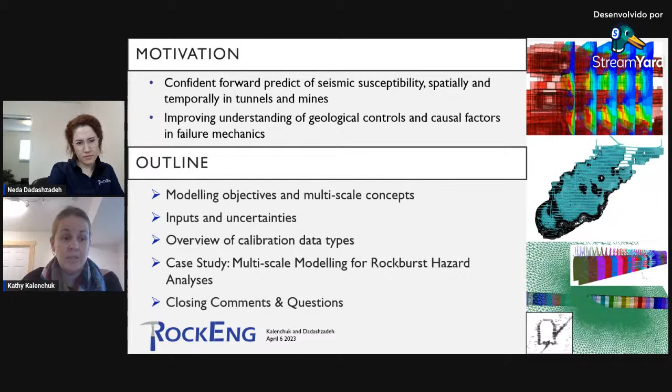The application of numerical models in geotechnical hazard management can be broadly classified into two groups: susceptibility modeling and mechanistic modeling. Susceptibility modeling investigates the likelihood that a geomechanical system will be exposed to a particular ground reaction. And this requires global project scale stress models, where our scale of interest is in the order of hundreds to thousands of meters. Often, global susceptibility modeling relies on either mechanistic analyses or empirical correlations to predict failure mechanics.

Mechanistic modeling aims to improve our understanding of fundamental mechanics, and this becomes critical for tunnel scale analyses. Our scale of interest for mechanistic analyses is in the order of tens to hundreds of meters, and the enhanced model resolution that is achieved improves our representation of constitutive models, and it also improves our ability to simulate the interaction of ground support systems with the surrounding rock mass.

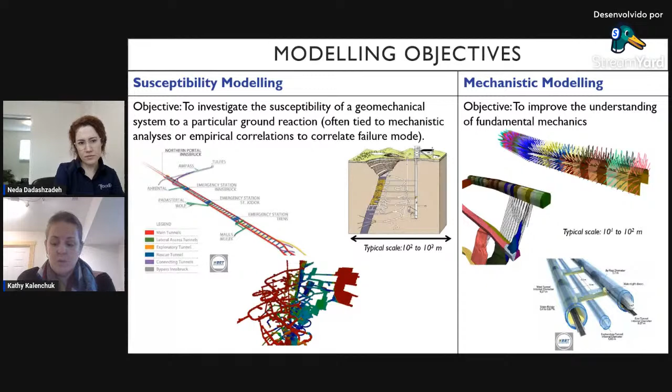When we develop strategic and tactical strategies to manage geotechnical hazards in mines and tunnels, we often rely on multiscale modeling. Multiscale modeling is a process where we make use of both global susceptibility models as well as local mechanistic analyses. The first step is often to do project scale modeling to provide a susceptibility forecast for global and local scale hazards. The second step is often local scale mechanistic analyses, and these must be coupled with our project scale understanding so that the local scale mechanics can be evaluated with an understanding of broader geological controls on boundary conditions and material competencies.

Once we have a holistic understanding of global geological controls on stress and material domains, a picture of project scale stress, strain, and state evolution, and a local understanding of hazard mechanics, interpretation of the spatial and temporal distribution of hazard intensity can be achieved. So these combined global and local efforts facilitate informed decision making when we want to develop and implement risk mitigation strategies.

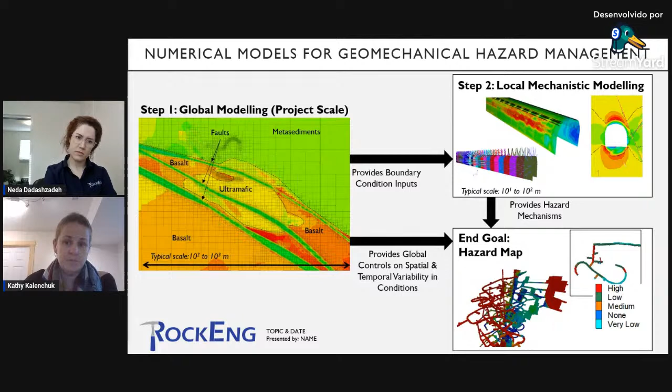When developing numerical models, we need to consider various inputs, and these include excavation shapes, geological domains, geotechnical domains, and our boundary conditions. These model inputs are achieved from a variety of data sources, and our level of confidence in each of these inputs is variable. The excavation shapes are often based on design solids or surveyed as-builts, and we generally have fairly good confidence in model geometries for most modern applications. Geological modeling and geotechnical modeling rely on similar data types. We often look to mapping data or drill core logging, and possibly the use of geophysics or other instrumentation.

Loading conditions or boundary conditions tend to have the most unknowns, particularly in situ stress state, which is often a very data limited component of our site characterization. Over the scale of an entire project, we tend to have very few measurements of stress state, and this is due to the inherent costs and difficulties in achieving reliable measurements of a global stress tensor while also capturing local variability.

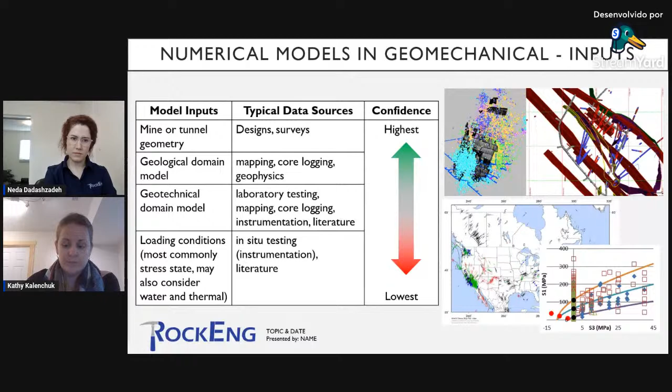Model calibration is the process of correlating observations of actual ground behavior with numerical output, and this helps us to refine numerical inputs. The back analysis of observational data is fundamental to achieving confidence in the inputs that we apply to a numerical system. So what's important here?

First of all, we need to have an understanding of our geological domains, geotechnical domains, and our global stress state. And where observational data is available, model calibration is critical for all components of our inputs. We have to calibrate not only material properties, but also our boundary conditions, also our constitutive models, and in some cases, we actually have to calibrate our input geometries.

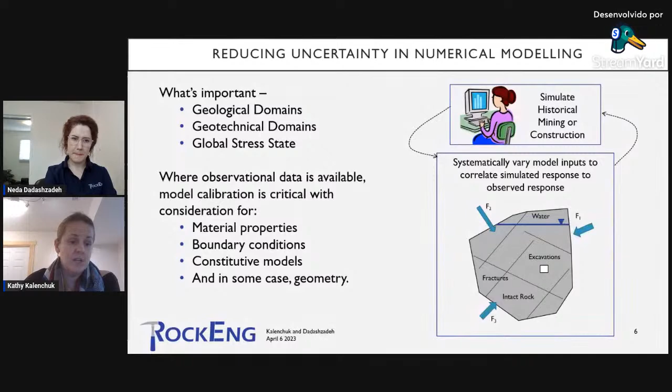There is a broad spectrum in the level of calibration detail that can be achieved, from qualitative ground response to sophisticated quantitative calibration. The level of rigor and detail of calibration is dictated by our data that is available. Qualitatively calibrated models provide us an indication of different classes of behavior under varying loading conditions, while quantitatively calibrated models provide direct indications of likely rock mass stress and strain behavior. Both of these approaches facilitate risk management.

However, quantitatively calibrated models typically have reduced uncertainty, which means that we can optimize our design and often work with lower factors of safety. Quantitatively calibrated modeling is exceptionally difficult to achieve because it requires very high quality instrumentation data. Now let's look at a few different types of calibration data.

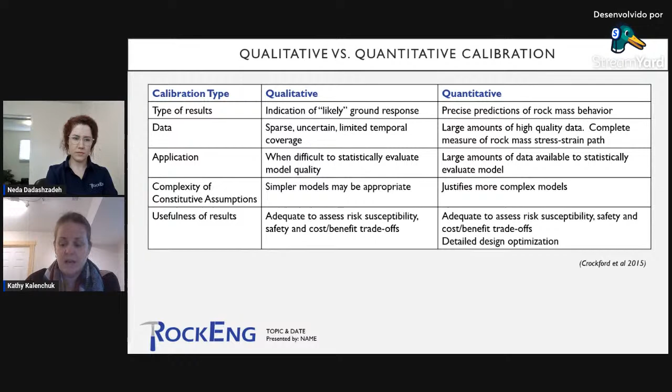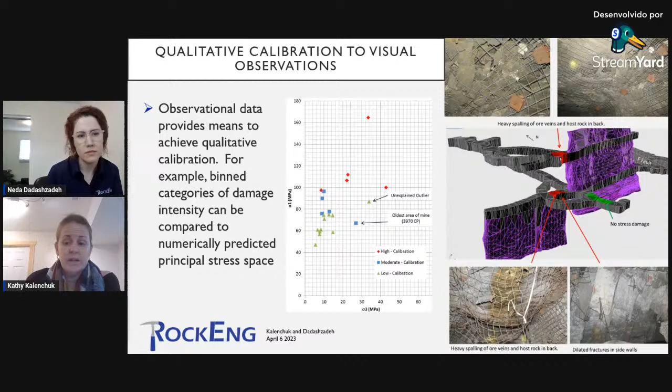The most rudimentary form of calibration data is visual observations of ground reaction. In this case, we have no real measurements of deformation or state, and so our calibration is limited to very qualitative means. I have a simplistic example shown here on the screen whereby damage mapping observations allow us to make a comparison of damage intensity to numerically predicted stress or strain states. A well-calibrated model would conclude that similar loading conditions for similar damage observations can be correlated for any particular geotechnical domain.

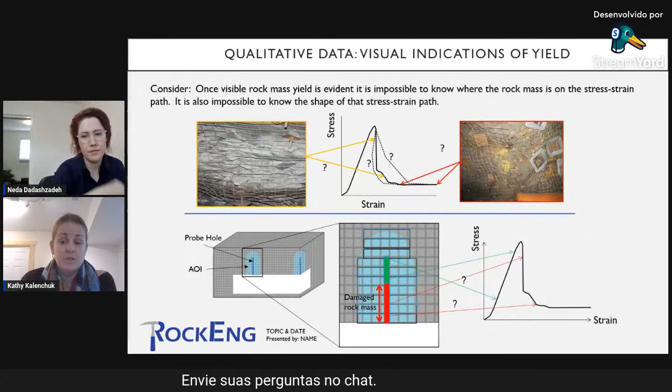It is important to recognize that if we have to rely on visual observations, they are not providing direct measurements of constitutive behavior. Once a rock mass has any visible evidence of yield, it's impossible to know where that rock mass is on the stress strain path. And this is a very significant limitation to model calibration. It is very difficult to define the shape of our stress strain path and almost impossible to accurately do post-peak parameterization. A few examples are shown here on the slide.

The top image is conceptually illustrating that damage observations, in this case in the tunnel walls and in the back of a tunnel, conclude that a rock mass is post-peak. But it provides no further information. This is a very black and white situation. The rock mass can only be classified as failed or not.

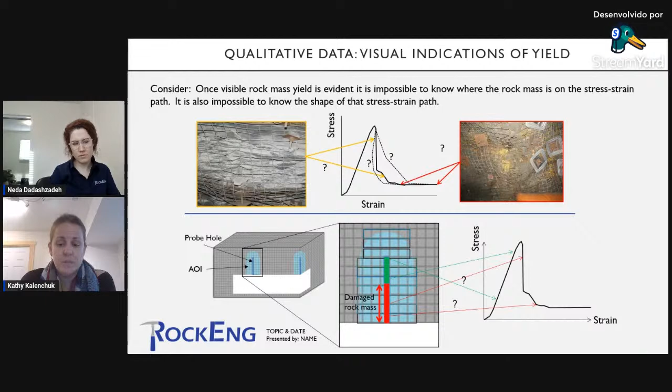The schematic on the bottom demonstrates conceptual probe holes. Geotechnical practitioners often rely on probe holes to observe damage depth around the periphery of an excavation. This provides a bit more information than visual observations of superficial conditions alone. However, we still do not have any direct measurements of loading conditions or strain accumulation.

Model calibration is improved when we have access to data from conventional instrumentation. Instrumentation provides physical measurements of rock mass stress state and strain accumulations. Stress and stress changes can be sampled by various types of stress cells or geophysical methods, and strain is measured by either superficial or borehole deformation monitoring. And there's a number of examples shown on the screen here of different types of monitoring systems, ranging from radar or laser scanning systems through to borehole instrumentation.

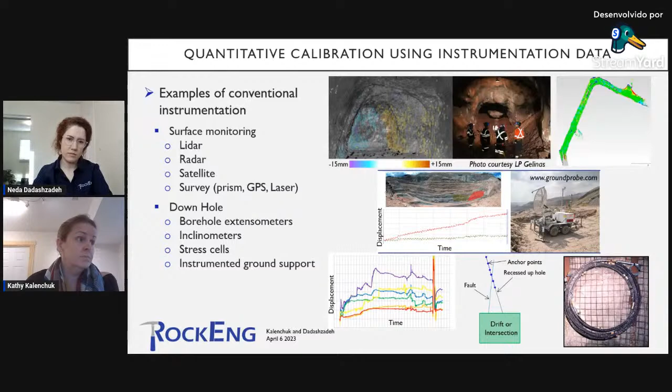When we work with conventional instrumentation to calibrate numerical models, the process is actually very straightforward, because we have physical measurements that can be directly compared to numerical output. What I have shown on the screen here is an example of an underground pumping station. Unfortunately, this particular pumping station has accumulated some damage due to squeezing of the walls. We can see in the photographs there's some cracking in the concrete liner and some floor heave in the excavation.

So in this case, the pumping station has several monitoring points along the main chamber, and those monitoring points could be used to measure closure and correlate it to numerical models. So the main chamber is illustrated here in the numerical model geometry by the red and green excavation. And along the axis of that excavation, we're monitoring closure. So some data can be directly compared from real life to the numerical model.

And what we have shown here in the bottom right-hand side of the screen is monitored closure, so physical measurements, compared to modeled closure, which comes from the numerical model. And we can make direct correlations on goodness of fit.

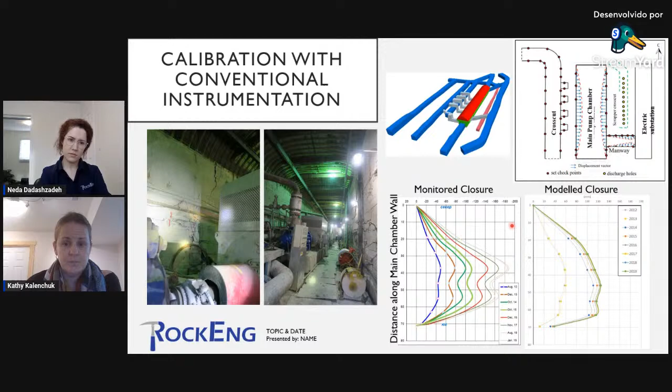There are a few challenges that we must acknowledge when we're working with conventional instrumentation data. First of all, spatial resolution. It is nearly impossible to get a fully three-dimensional picture of stress and strain unless we have really big monitoring budgets. Individual measurements provide information at specific points in space, and practitioners have to be careful to ensure that they are understanding whether particular observations represent a global ground response or a localized mechanism.

A second challenge in conventional instrumentation is that our goal is to capture measurements of the complete stress strain path of a rock mass. And we very often do deformation monitoring, but less often we do stress monitoring. And so we don't get the stress component of the ground reaction, typically. The third challenge is temporal coverage. Instrumentation is commonly installed after some amount of rock mass damage has accumulated. This is particularly true in mining, where instrumentation is often used reactively rather than proactively.

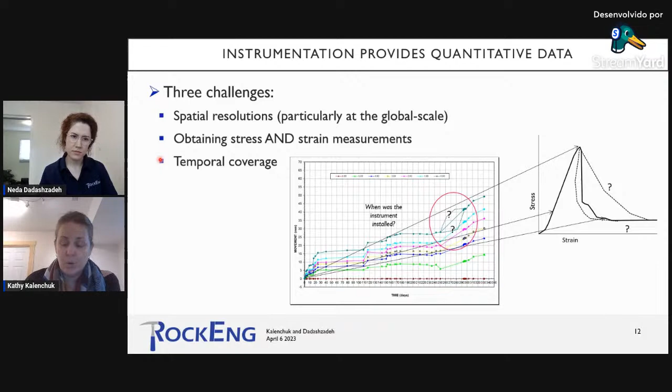The third type of calibration data that I would like to mention is microseismic data. Microseismic monitoring is much more common in the mining industry than in civil projects. Seismic data provides us a fully three-dimensional volumetric representation of where the rock mass is transitioning through the failure process. And it also characterizes the energy that is released during fracturing and deformation.

What I have shown here in this slide is a long section view of a mine. All of these red lines are different tunnels in the mine. And all of the colored dots or circles that we see are seismic events that have been measured by the monitoring system. And so you can see some areas have no seismic events occurring. This would be areas of the rock mass that are not actively failing. And where we see lots of clusters of seismic data, it is indicating to us that our rock mass is going through the failure process.

And so we know that the onset of seismicity occurs well before peak strength. This is generally correlated with crack initiation at the laboratory scale. Seismicity will generally ramp up in intensity as we approach the peak strength of a rock mass. And then post-peak, we will continue to see some seismicity until a rock mass becomes aseismic, at which point we know that we're in a residual state. So with this knowledge, we can effectively map spatially where the rock mass is transitioning through a failure process.

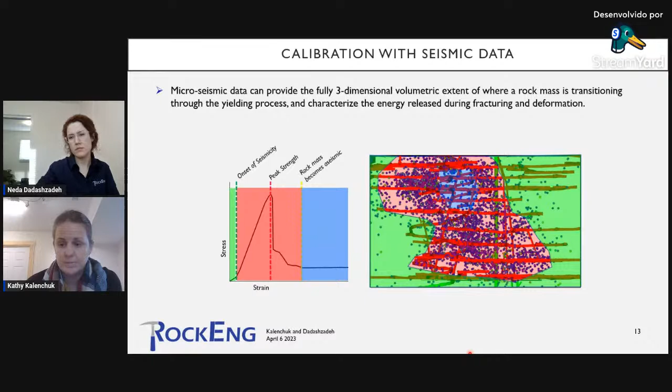When you have good quality seismic data, there is excellent opportunity to achieve quantitative model calibration. And this is done by using our seismic data to sample the stress, strain, and yield states within a numerical model. And for any particular geotechnical domain, the model state should be statistically repeatable where seismicity is happening, because the material properties are constant within an individual domain. We expect rock mass failure to occur under reasonably consistent loading conditions.

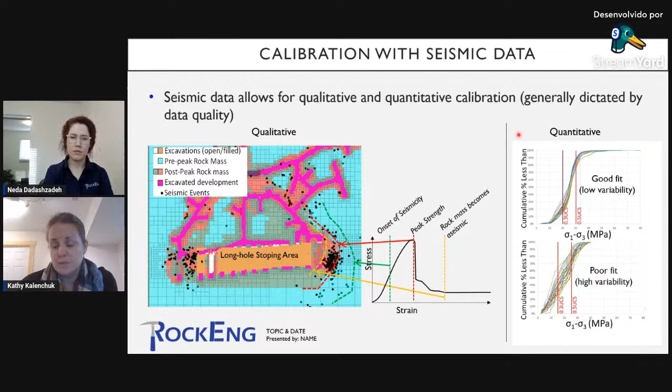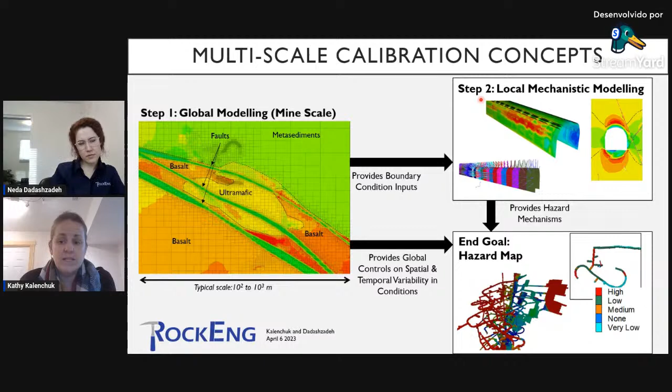Now, going back, let's recall that geomechanical hazard analysis relies on both global susceptibility modeling and local mechanistic modeling. And it's important to recognize that the calibration process, the inputs and the outputs will vary quite significantly depending on the scale of your simulation.

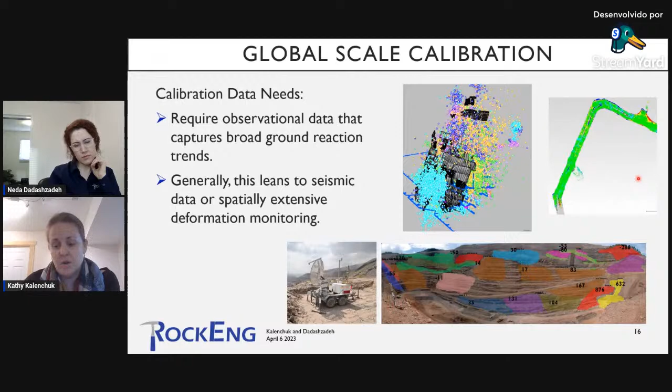If we look first at global model calibration, we generally require ground reaction data that's available for a large portion of the project volume. Therefore, we generally require seismic data or deformation data with broad spatial coverage in order to achieve calibration. So here's an image showing seismic data around an underground mine. Large slopes we monitor with radar systems, so that gives us deformation monitoring over a large area of our interests. And evolving technology using LiDAR and scanning tools in underground excavations allows us to achieve broad spatial coverage of deformation monitoring in underground excavations.

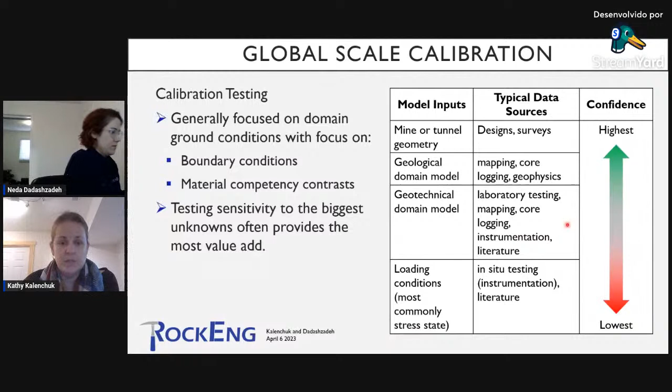At the global scale, calibration testing commonly focuses on domain conditions and the influence of both boundary conditions and material competencies. So in my experience, testing should prioritize a focus on numerical model inputs where we have the greatest uncertainty, and that provides the most significant added value to our modeling project. And of course, our greatest uncertainties are often situated around loading conditions, boundary conditions, and in some cases, geotechnical parameterization. So in most cases, as I said, the largest unknown is in situ stress state, and methods for how we initialize boundary conditions in a numerical model can have a substantial impact on the quality of our calibration.

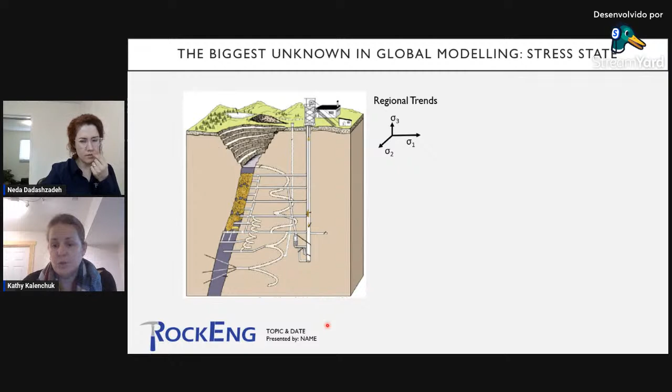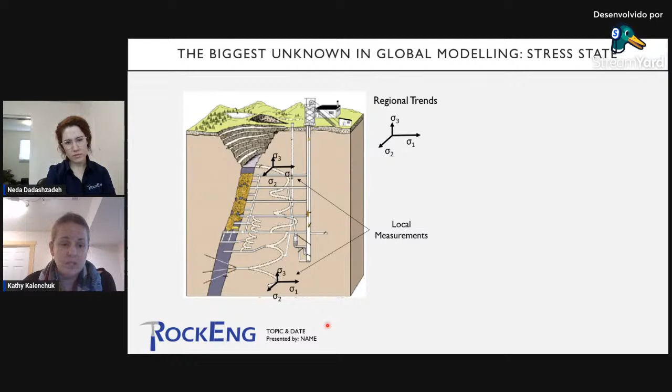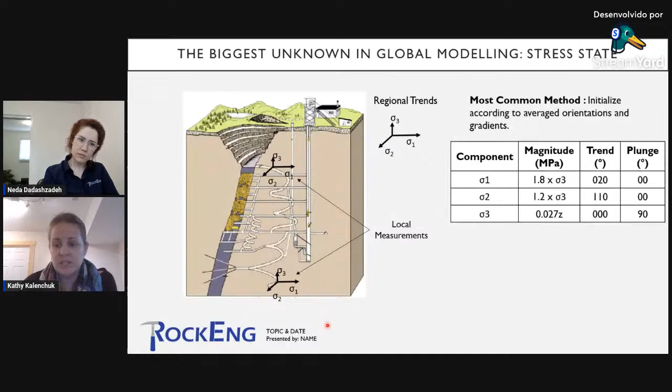So let's look briefly at a few different methods for applying in situ stress to a numerical model. Consider here that you have an underground mine, and we have to think about what types of data might be available. There may be a conceptual understanding of regional in situ stress trends, maybe based on tectonic history. And if we're lucky, we may have a few local measurements of in situ stress from our project area. The most common method for initializing in situ stress in a global project scale model is to simply initialize our average boundary conditions, sometimes with gradients associated with depth.

An alternative method for initializing stress is to use strain-based stress initialization, and this allows us to capture stress state gradients that are associated with stiffness contrast between geotechnical domains. With this method, strain is induced within the numerical model, which is reasonably consistent with the site geological history. And it allows stress within individual geotechnical domains to come to a more natural, non-uniform state. So to simplify this, you can consider a system of springs. If you apply a constant deformation to two springs with varying stiffness, the required force to achieve that deformation varies. So hence we are effectively squishing and squeezing our numerical model until we have a representative stress state.

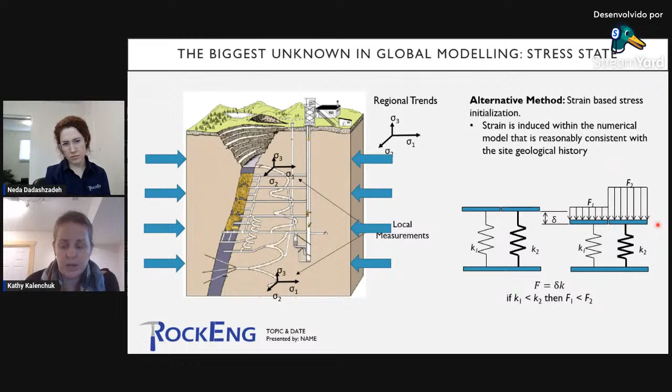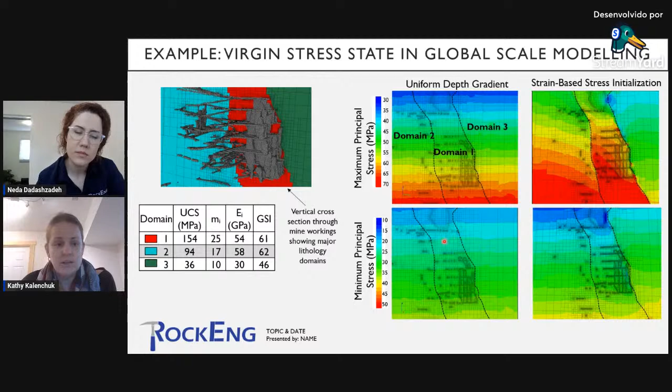Now, when you initialize numerical stress, there's 2 methods: a uniform depth gradient, which is shown by these cross sections on the center portion of the screen. We can see stress magnitudes increasing with depth. And the alternate case would be strain-based stress initialization. So here we can see there are 2 wildly different results for the stress initialization. And Dr. Dadashzadeh will demonstrate later the importance of this in our mechanistic analyses.

Now, jumping back to local model calibration rather than the global calibration, we know that the ground reaction observations have to be much more detailed. And so we generally lean on using conventional instrumentation to calibrate our local mechanistic analyses.

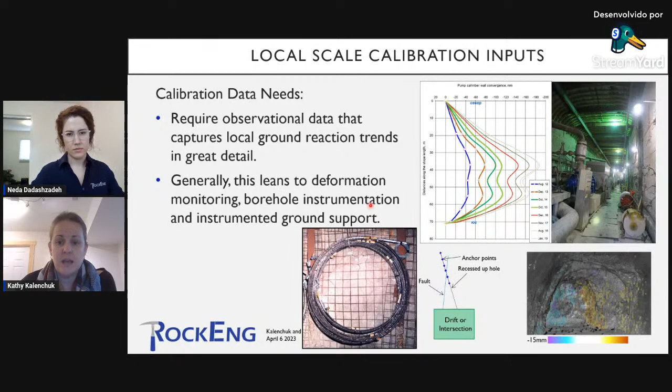So last statements here before I hand the floor over to Neda. I just like to point out that in summary of model calibration, it is critical to calibrate our models in order to have confidence in making forward predictions. But the value in model calibration goes well beyond predicting the future. At the global scale, we strengthen our understanding of broad geological. We improve geotechnical domain, and we improve confidence in our boundary conditions, as well as allowing for mechanistic domaining.

At the local model scale, calibration allows us to improve confidence in our constitutive behavior. It provides explicit evaluation of failure mechanisms, and it reinforces our understanding of geological controls on ground reaction. And now we're going to switch over, and Neda will demonstrate multi-scale modeling through a case study.

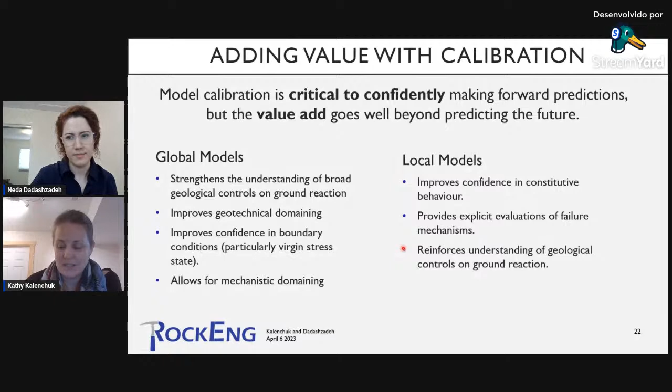Thank you, Dr. Kalenchuk.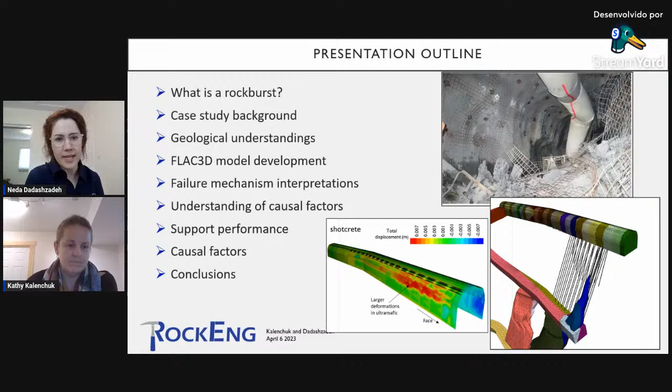Okay, so for the rest of this lecture, I'm going to present a case study where a large magnitude rock burst in a deep mine tunnel was back analyzed with numerical modeling using FLAC3D. So during the presentation, I will first briefly touch on some background of rock burst failure mechanisms, so if there are people from different backgrounds, hopefully they will follow the talk easier.

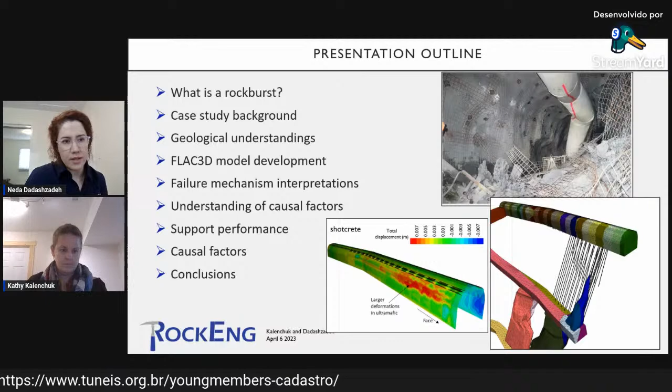And then I will go over some background of the case study itself, and then we will look into details of the numerical model, how the ground reaction was interpreted, and different ground reaction indicators, including support performance, will be analyzed. And finally, we will summarize the causal factors and conclusions.

So sudden deformations occur in hard rocks under high stress conditions, and this ground response induces seismic events that result in energy release in the form of seismic stress waves and seismicity. So as a reference to get a feeling, the excavation-induced seismicity is somewhere between the large magnitude events that are induced by earthquake activities and the microseismicity that is typically measured by acoustic emission tools. So excavation-induced seismicity in deep excavations is somewhere between these ranges.

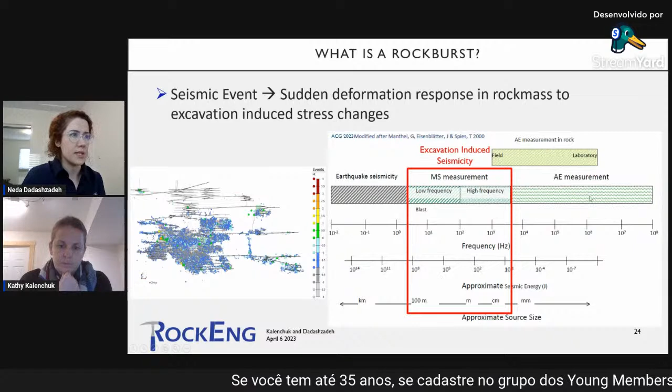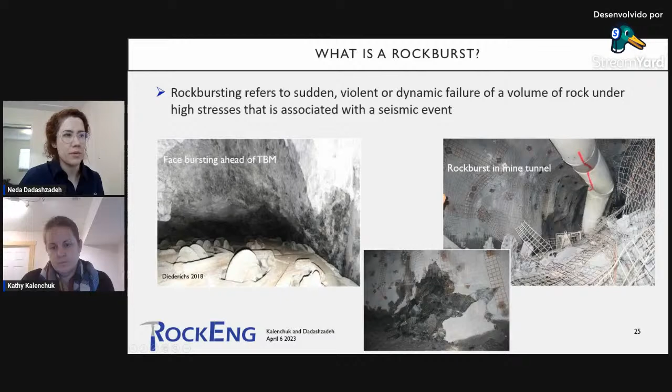So rock bursting is a widely recognized hazard in high-stress excavations, which specifically refers to sudden and violent failure of a volume of rock that is associated with a seismic event. So on the left figure, you see an example of a rock burst ahead of a TBM machine. And on the right, you see a major failure of a mine tunnel, which we will focus on shortly in this case study.

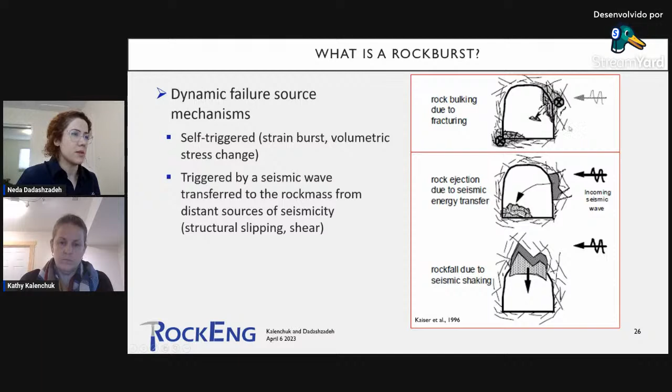So in general, rock bursts are categorized in two classes of source mechanisms. It can either be self-triggered, which is also known as strain bursts, and are commonly associated with stress-induced spalling or slabbing at the periphery of the excavations, which is schematically shown here, or it can be triggered by a distant seismic source. This can be slipping of geological features like faults or other joints, which can transfer seismic energy to the rock mass at the excavation boundary. So the focus of this talk will mainly be on strain bursts, but we will briefly touch on this mechanism as well.

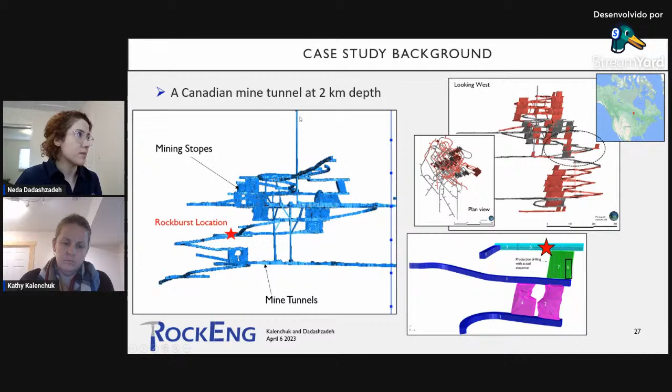The case study investigated here occurred at a Canadian mine. The actual mine layout is very complex, but here we have an example of the area of interest. You see some networks of the mine tunnels, which are access to the ore body, and you also see the stopes, which are actually the ore body that needs to be excavated. So the rock burst occurred in this tunnel, which is approximately 2 kilometers below the surface.

So in terms of local geology, the top figure shows a cross-section through the tunnel where the event occurred. The location where the rock burst happened is indicated by this star. So the major section of the tunnel is in basalt, which is a fairly stiff and strong unit, and the far end of the tunnel is in ultramafics, which is relatively softer compared to basalt. You see the contact shape between the basalt unit and ultramafic unit shown by this red shape. There is a local fault that is subparallel to the tunnel as well. And looking from the front view, looking north-south here, there are also two regional faults that are also subparallel to this tunnel.

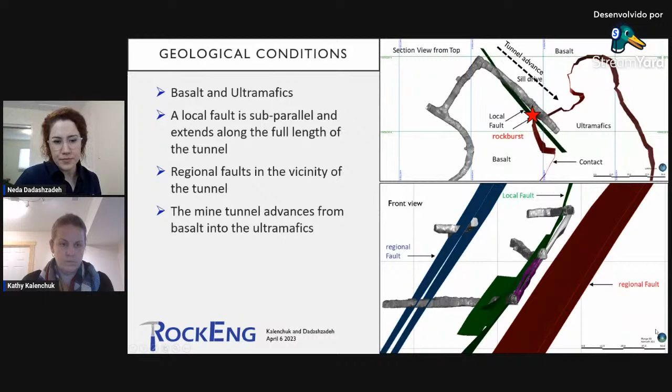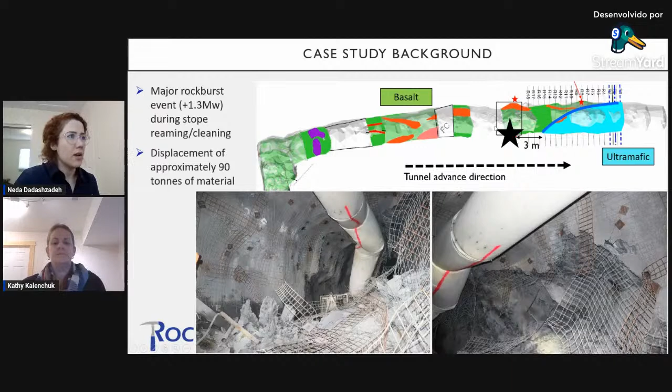So the tunnel advances from basalt into the ultramafic unit. The major rock burst that is the focus of this talk occurred within the basalt unit on the south wall, roughly 3 meters behind the ultramafic contact, which is shown by this blue between the ultramafic and basalt. The event occurred 2 months after the tunnel excavation was completed, but during the advancement of the tunnel itself, the drift had been seismically active with some less severe damaging events on the north wall. But the major event occurred when some drilling was happening on the lower level, and during the cleaning of these blast holes, it occurred, as I said, about 3 meters behind the contact.

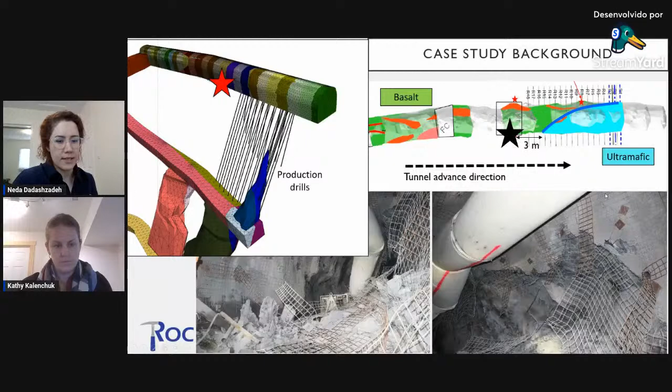And the seismic SMTI analysis from the seismic event also identified 2 potential failure planes, which are coincident with the east dipping and the southwest dipping planes. So putting all this information together, the damage incurred by the rockburst event in the south wall was associated with 2 local structures and this local fault that the geometry is representing.

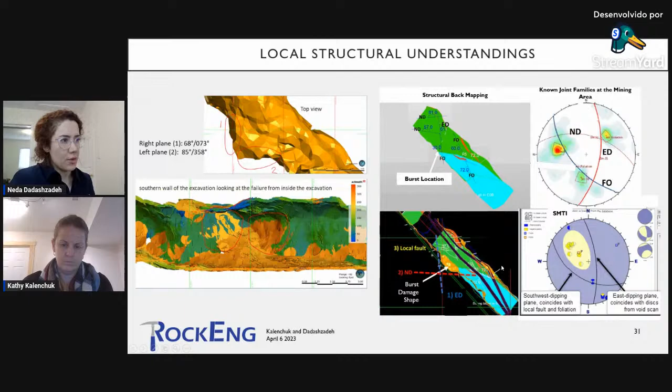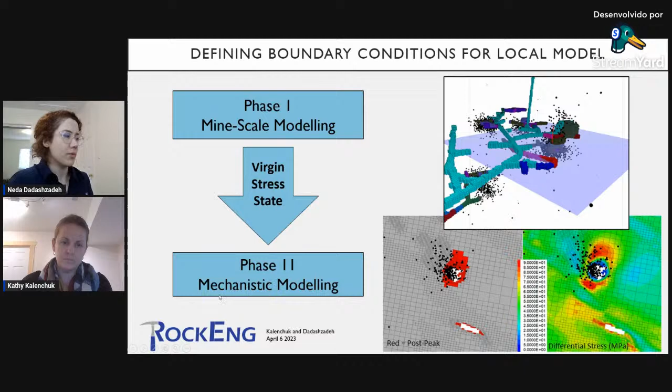So for back analysis of the failure, extensive numerical modeling work was done for this mine site. The first phase of the analysis included a large mine-scale numerical model, which was calibrated using mine-wide seismic data and ground reaction observations. And the model results from that global modeling work were used to define the boundary conditions locally where exactly the rock burst happened. And then those were fed into the mechanistic modeling that I'm going to show.

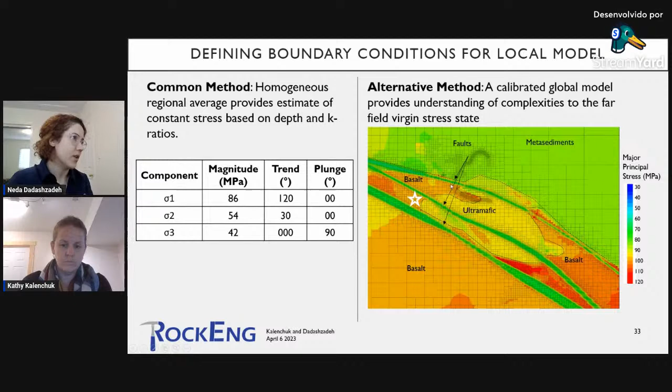So this slide also shows the significance of the global modeling using the strain-based loading, actually. So we have a plan view section through the burst location, and this is indicated here for your reference, and this is the mine tunnel. And the contact, just for your reference, this is the contact between the basalt and ultramafic. So in the left, you see a constant stress tensor based on depth, and the right is actually the stresses that are sampled from the global model, which clearly shows the stress heterogeneity between two lithology domains.

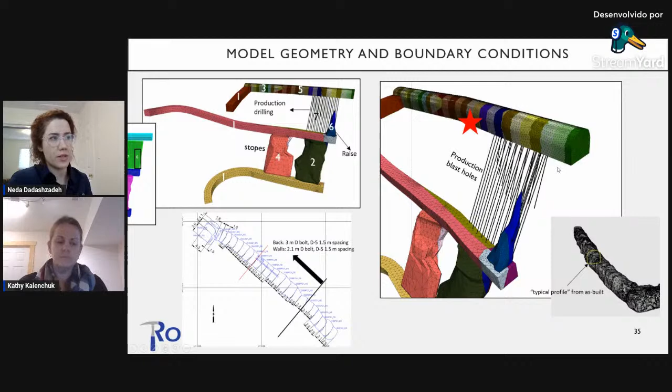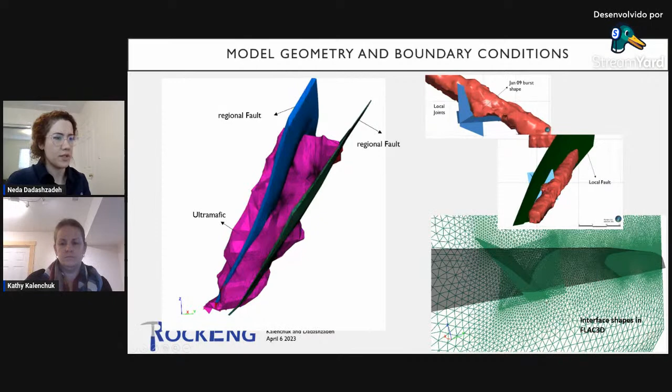So this slide shows the ultramafic contact and two regional faults, which were modeled as continuum domains, but the local structures and the local fault were modeled as discontinuum interfaces. We use generalized Hoek-Brown for the regional faults, whereas for the structures, we use the bilinear Mohr-Coulomb criterion.

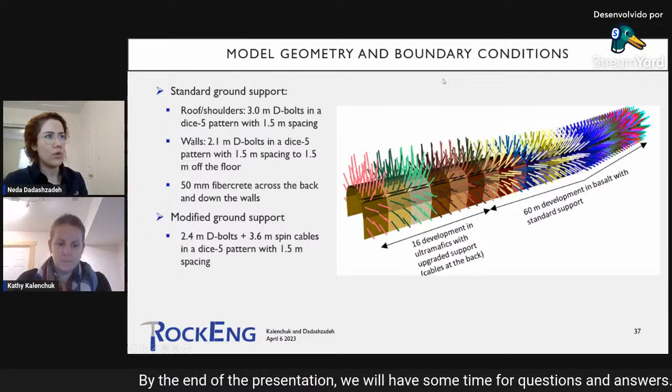So the sequential excavation and support installation process was also implemented. The first 60 meters of the tunnel, which was driven within the basalt unit, had standard support, with 3 meter and 2.1 meter D-bolts on the roof and on the walls, respectively, and an addition of 50 millimeters of fibercrete on top of it. When the tunnel encountered the ultramafic unit, about 16 meters of the rest of the tunnel, the ground support was modified and a heavier system was used because of the seismic activity that was observed. So 3.6 meter spin cables were added at the roof. So all of these details were implemented in the model.

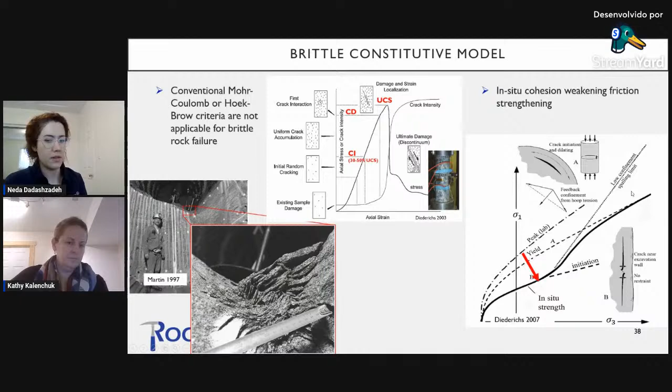So for the brittle rock masses, we use the in situ cohesion weakening friction strengthening concepts. So for the sake of time, I'm going to skip this, but if there are any questions, we can discuss more on it. I just want to refer here that, again, using local models, because your scale is smaller, now you can incorporate more details and more advanced inputs in your model. So conventional shear-based criteria that are applicable for mechanisms other than brittle failure may be used in larger scale, but when you go into smaller scale, you can actually use brittle constitutive models, which is the case here.

So there weren't many detailed damage depth understandings for this case study. So to calibrate our numerical inputs, we partly relied on the understandings from literature, and also we considered the damage depths at the burst locations that were observed on site.

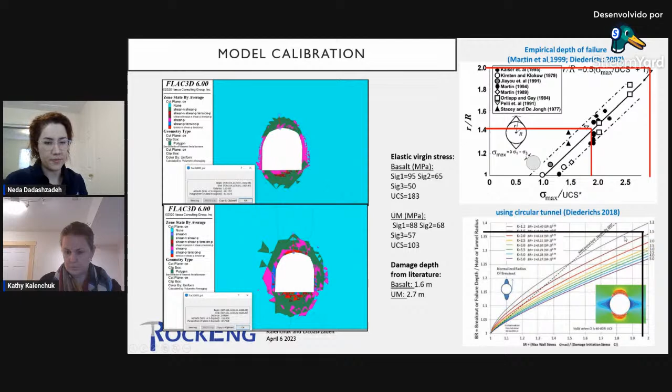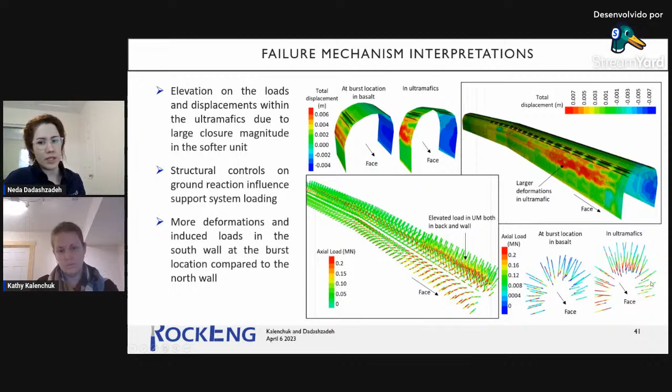So what was interesting is that the induced loads on the bolts and also deformations on the south wall, where it is driving along the structure, are significantly larger compared to the north wall, where such a structure does not exist. Another interesting thing we see from these figures is that the loads and deformations within the ultramafic unit are significantly larger compared to where the tunnel is driving within basalt. So this indicated a clear strain loading on the support system in ultramafic.

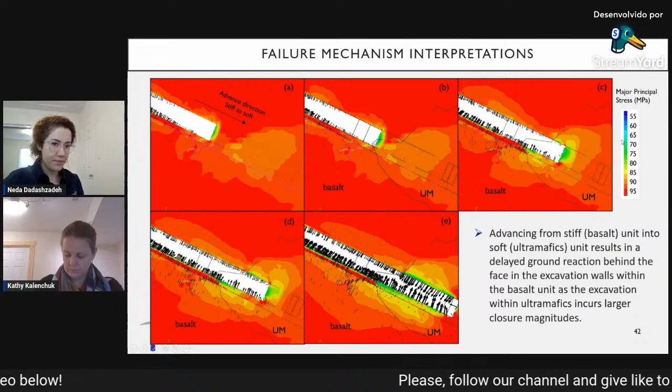So we also looked at the ground reaction in detail at the burst location. I have a little bit of background on the interpretation method that we used here. So when we look at rockburst hazard potential, the damage zones around an excavation are critically important. The response in hard rocks is very sensitive to confining pressures. So at the excavation boundary, when we have very low confining pressure, the damage is at macroscale because the cracks in the rock can easily propagate. So the rock volume around the excavation is highly damaged and it's actually failed. It cannot retain more load. So this zone is called the highly damaged zone, or HDZ, or in literature, it's also referred to as the inner shell.

So as we go away from the excavation boundary, within high confining pressures, the outer excavation damage zone is where the confining stresses are very high. So the damage is actually isolated. The rock is yielded, it's damaged, but because of the confining pressures, it's isolated. So the rock can still retain the induced loads and it's under contraction. The transition zone from the highly damaged zone to the outer EDZ is called the inner EDZ. And in literature, it's well understood that strain bursts occur within the inner EDZ zone. So we can focus on this location and look into our numerical models to predict the potential burst volumes.

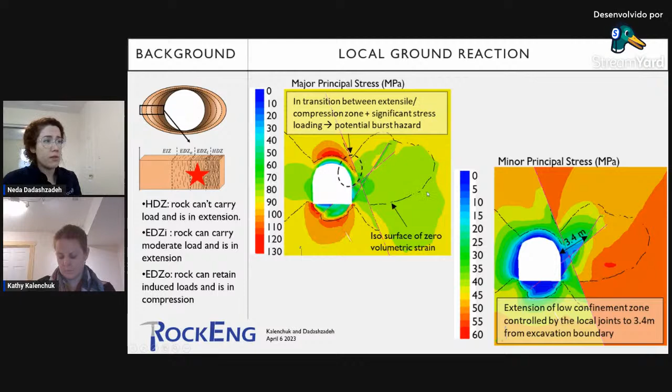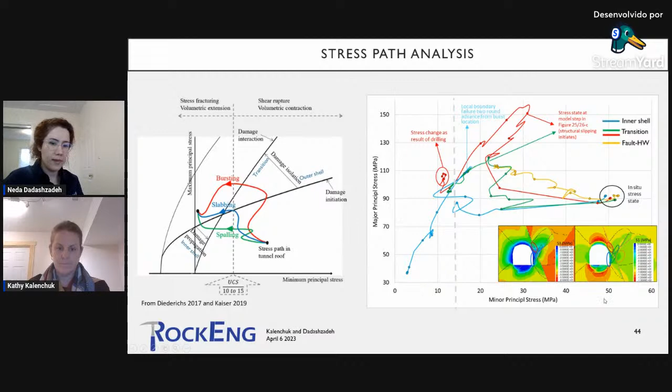So the event at the burst location was approximately 1.3 moment magnitude, whereas the deformations and failures that we got from the model didn't actually indicate the slip mechanism to be the potential failure process.

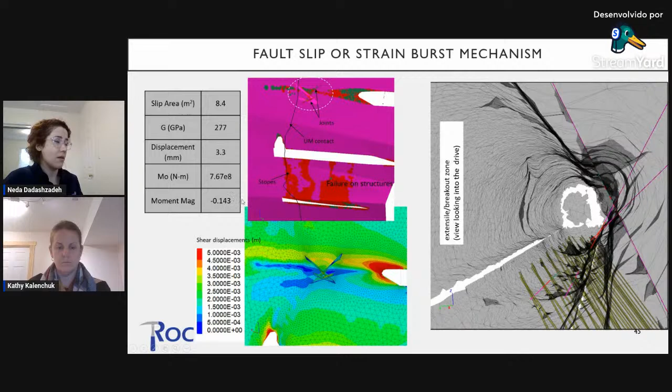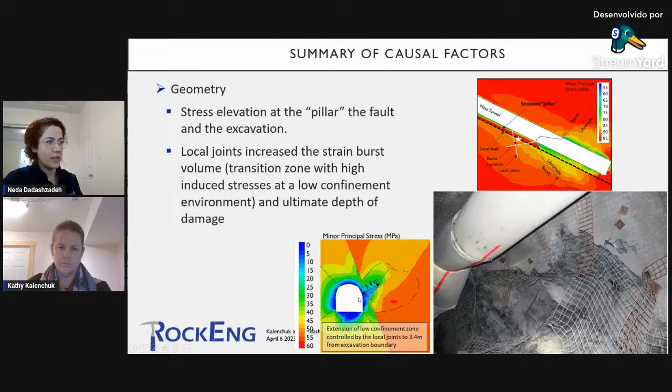So as a summary, the causal factors that resulted in this big rockburst event are categorized in two classes, either geometry or geology. So in terms of geometry, the stress elevation at the pillar that was created between the fault and the excavation wall on the south wall was playing a major role. Then local joints increased the strain burst volume, as you see here, which is the transition zone with high induced stresses at very low confinement conditions, and also increased the potential depth of damage.

In terms of geology, virgin stress state heterogeneity, before the excavation was even made, as a result of stiffness contrast between two lithology domains, produced a hazardous environment for the tunnel development from basalt into the ultramafic. Significant stress heterogeneity then occurred within this pillar as a result of the geometry conditions that I explained, and also the initial heterogeneous stress conditions.

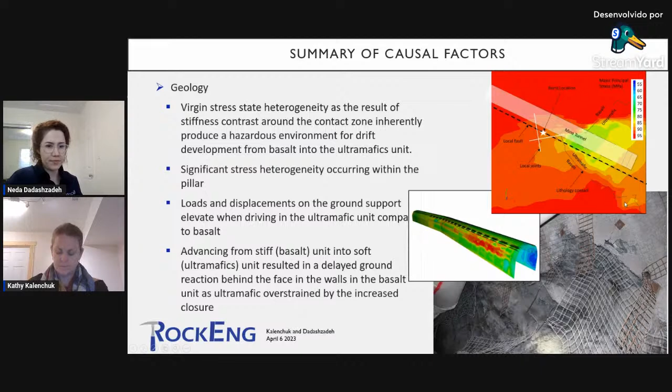Loads and displacement on the ground support were elevated when driving in the ultramafic unit compared to the basalt unit that we looked into. And one of the major influencing parameters was the direction of the tunneling, which was advancing from the stiff basalt unit into the ultramafic unit, which resulted in a delayed ground reaction behind the face in the walls in the basalt as the soft ultramafic was straining and increasing closure. And that concludes my case study presentation.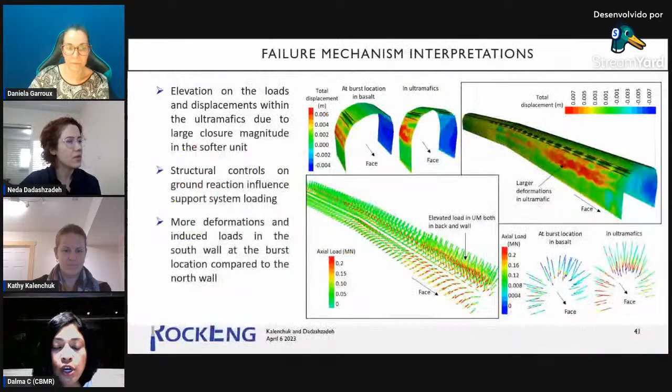Okay. There's more questions here, but Dalma, you have a question before I go to Gabriel? Yes. Well, first, thank you, Dr. Neda and Kathy, for this excellent lecture. I have a question on slide number 34, if you could please go back. My question is, what would happen if you would continue with constant in situ stress? Right. Yeah, that's a great question.

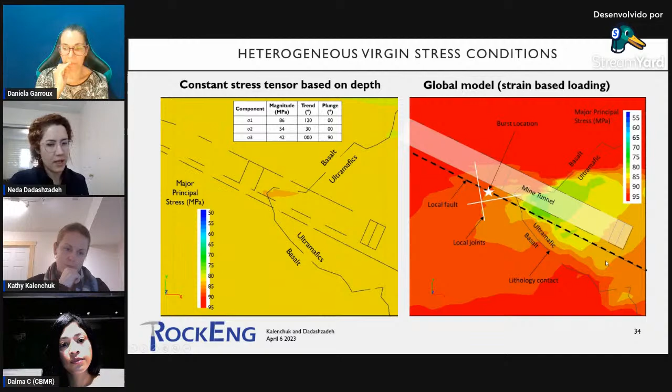So here you clearly see how stress heterogeneity is underestimated if you take a simple understanding of stress conditions before the excavation is done. Because of the time, I didn't have those slides here, but now that the question is here, I can show some cool plots. This is showing the model results where the complex in situ stress was used, which I presented during the talk. And these are showing when you just include the constant stress condition. So you can see how significantly the depth of damage will be underestimated.

And this is a very important input. Understanding the depth of damage is an important parameter for ground support design and many controls that you would plan to take. So simple stresses can underestimate this understanding. The volume of the potential rock burst is dependent on your understanding of this depth. And also you can see here, as I presented, this is the burst volume, which I called the inner excavation damage zone. The complex in situ stress model could predict that zone, whereas with a constant stress, you would simply miss that zone. So this doesn't show the potential hazard.

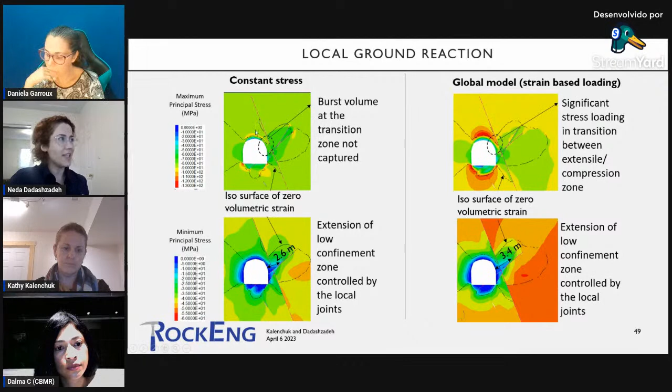If you want to use this model for forward predictions in other areas of the mine using that simple understanding, you would miss predicting the potential hazard. I probably have another cool slide here. This is showing the stress path within the burst volume. The red line is what I showed in my presentation, but this dashed line is the stress path at exactly the same spot when using the simple model with simple stress conditions. And you see the induced stresses are way smaller than the complex condition. And as I said, the hardening process, which actually is a warning that this burst volume can fail, is not captured with simple models.

Thank you. Thank you.

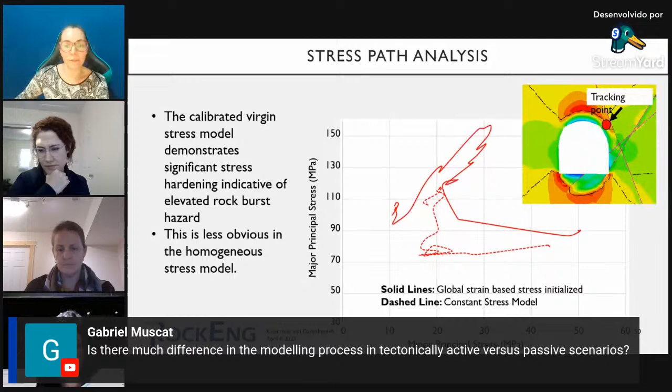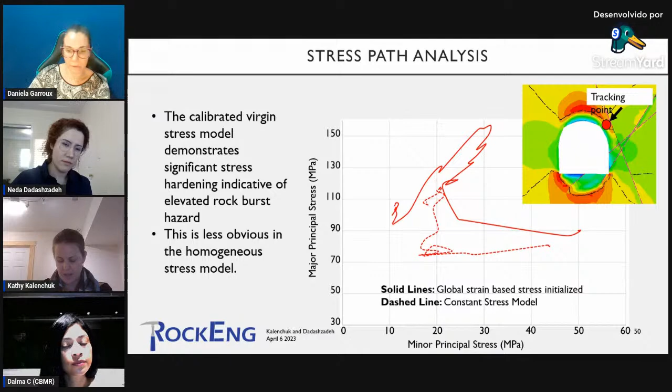So here, talking about stress, we have a question from Gabriel. Is there much difference in the modeling process in tectonically active versus passive scenarios? Like, is it more challenging, perhaps? Okay. I think if you were referring to tectonic where you would have natural earthquakes, the process for numerical modeling does vary a little bit because you need to account for potential earthquakes in your boundary conditions. And this is normally done by applying static acceleration loads as a boundary condition to our numerical models.

It's important to recognize that natural earthquakes that could impact an excavation are generally larger magnitude, but much further away. And so the waveforms attenuate, they're low frequency, and they don't generate the same energy, the same peak particle velocities as a near field seismic event that would be induced by an excavation activity or by a mining activity. So the hazard actually changes. And so we can often tolerate doing that static acceleration loading rather than dynamic loading. That's a generalization. Sometimes it may be appropriate to put a dynamic load in if you're in an earthquake-prone area.

Thank you. I think we don't have more questions. However, because here it's a very different environment than Canada, I'm always very curious about the life, like going to the mine in Canada, and I heard some stories when I was studying in Kingston about bears, and that's a bit dangerous, or like it is super cold and so on. Have you guys already encountered a bear while going to the mines or doing some exploration? I've seen foxes. Okay, foxes, beavers. I've seen those, never bears. Kathy, you met a bear once, is that right? I've seen lots of bears working in